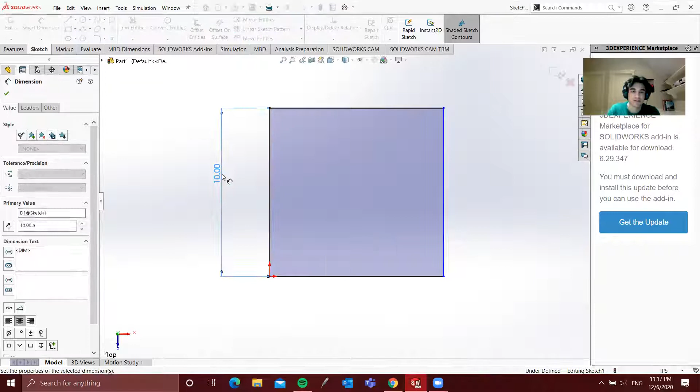On the top, actually, no, we'll wait for that. But essentially, I'm going to use the 3-point arc tool to inscribe a little arc within here. It's perfectly fine to do any arbitrary point. The only thing is you just want to make sure your angle here is 180 degrees as I've got it, coincident with the midpoint of this particular thing.

Although later on we're going to be getting rid of this line, so that relation will automatically go away. We'll fix that later on. But essentially, you want the side edges of this arc to be 1.125 inches away from the rectangle we've created, and then you want the radius to be 4.75 inches.

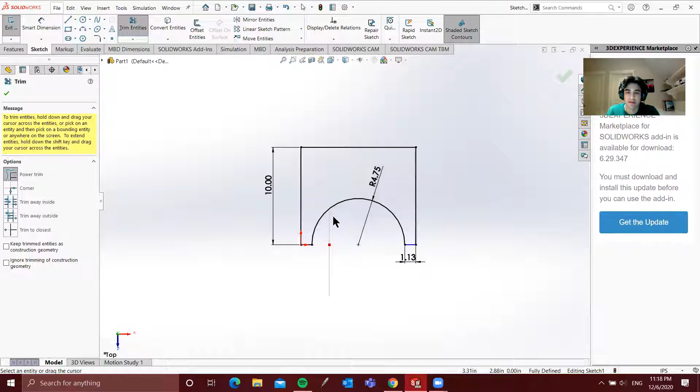There you go. And then the last step would be just to get rid of this line here. As you can see, we're underdefined, so we'll fix that very quickly. We have a length here, and we can apply a vertical relation with the midpoint of this top line. So essentially this arc is now stuck in place, it won't move anywhere, and we've fully defined all of our dimensions.

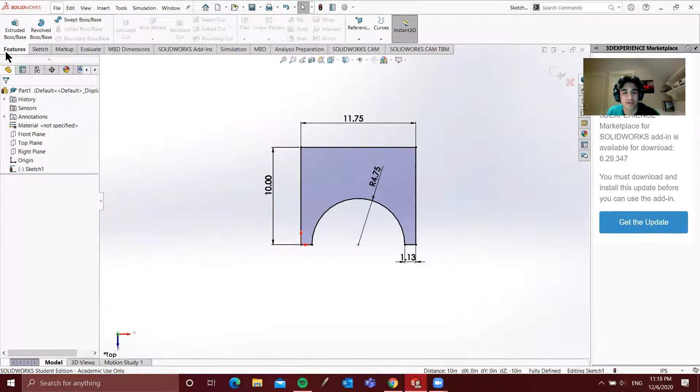So from here, I am just going to extrude this. Let's say 14 inches should be adequate. So it should look something like this, almost like a little Lego character's hand.

And what I'm going to do now is use our trusty mirror tool. This could be very useful because essentially what we want to do, so this is one cylinder, we want to propagate this 3 additional times. So what we can do is select our mirror face to be this edge right here.

And then we want to mirror this body. If we do that, and ensure that merge solids is selected, essentially that'll ensure the whole thing is just one homogeneous body and that you don't have 2 distinct bodies. If we press OK, you'll notice there's no line intersecting both of them, so this is just one proper body that we've created.

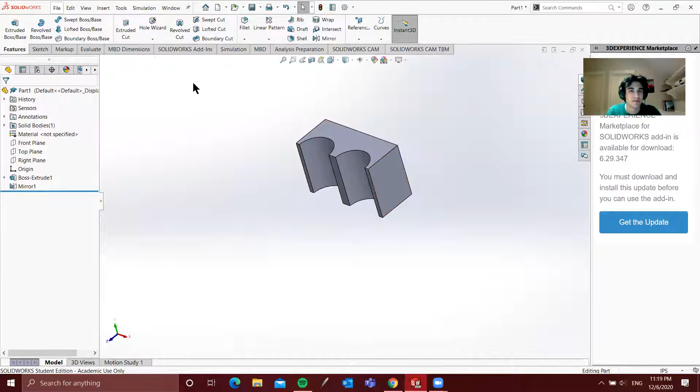Beautiful. And what we're going to do is just replicate this. So I'm going to click this mirror face plane right here, and then I'm just going to click this body once more. As you can see, we have enough space for 4 cylinders.

Now, keep in mind for this engine casing, what we're going to do is essentially have it be like half of an engine casing, just so you guys can see the actual motion of the piston without having to do a split section view.

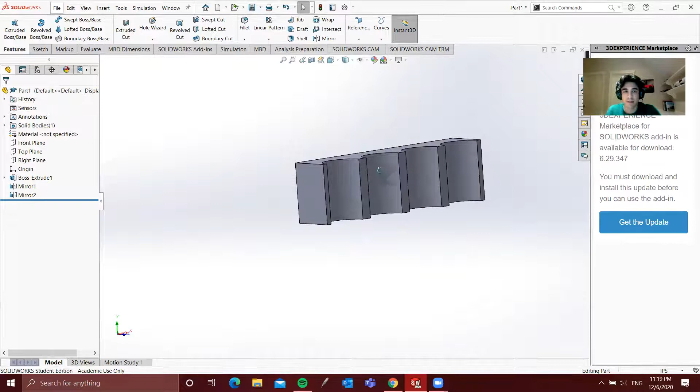Now we finished our first part. What we need to do is apply some fillets here. So let me see, our fillets, according to my dimensions, they should be 1 inch. Yeah. Oh, sorry. Don't know why it chose that.

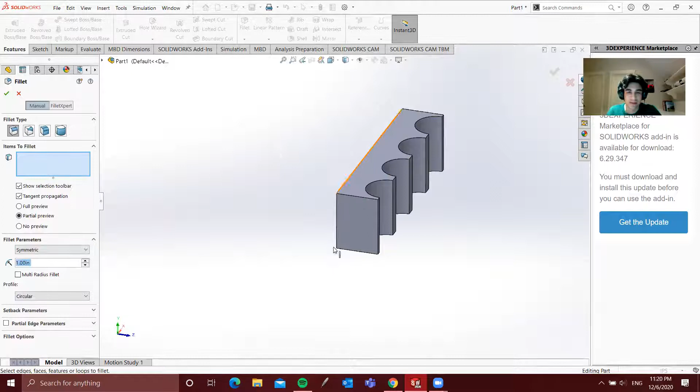Accidentally exited the choice. There we go. And we're going to just click these 2 back corners. All right. If we apply that, this is what you should have so far.

So we can already see this starting to take shape. I'm going to create a new sketch on the bottom of our new body, and make sure that the camera is properly oriented. From here, essentially all we have to do is press convert entities.

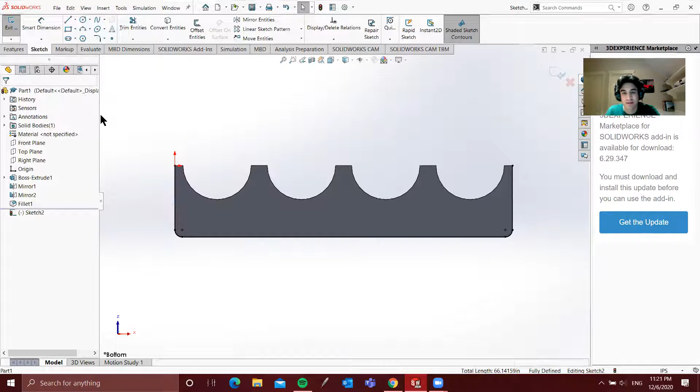Oh, my apologies. Okay, we'll select all of these different components, just these exterior components out here, and just press OK.

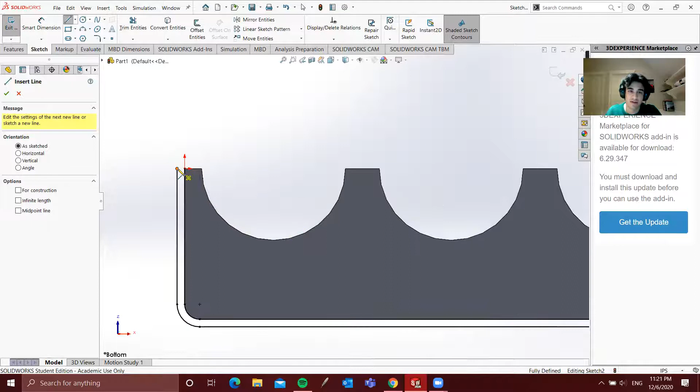And then from there, all we need to do is offset all of these features or lines by 0.5 inches. I'm just going to reverse the direction on this. And then the only thing left to do is close the contour such that we can extrude this, so we're going to draw a horizontal line from the top of each corner.

As you can see, we have this dark blue fill within our sketch contour, so this is good to extrude and it's fully defined. From here, we're going to flip the direction and extrude this by 0.5 inches, the same as the length of extrusion here, so we'll have a nice square rectangular prism. We press OK here.

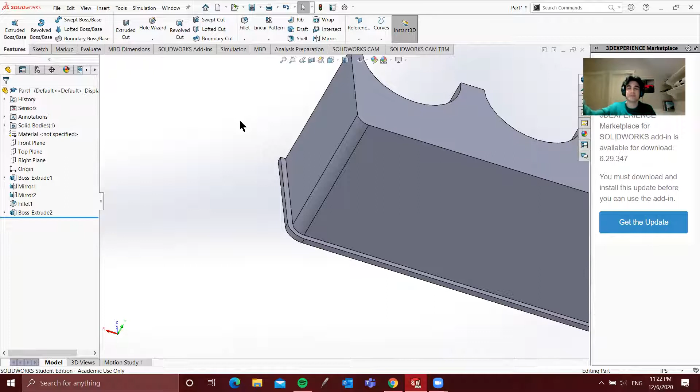Should be good to go, and it's merged our body. Now, we don't want to keep propagating the same feature over and over again for each of the different levels of this casing, so what we're going to use is the linear pattern tool. This will allow you to linearly create duplicates of the feature you just made.

We're just going to go up the casing. For our direction, I'm going to have this selected, just clicking this top or vertical line here. Doesn't matter, it can be any arbitrary line you want. Referring back to my previous notes, I'm going to put a spacing of 1 inch, and we want 14 instances.

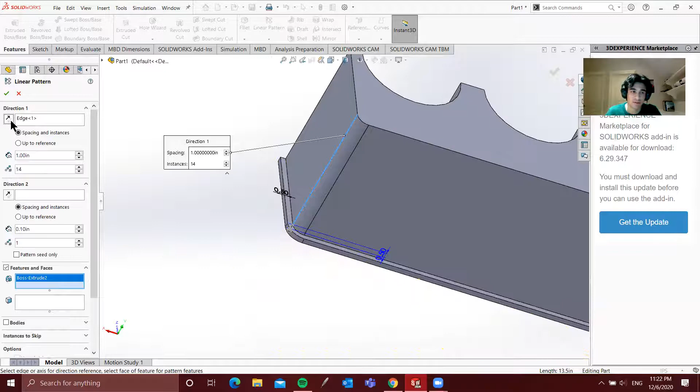Now what's left is to select our feature. We're just going to select this new edge that we created, and flip the direction, since we essentially want to create these ribs on the outside of the casing. And there we go, you see it's all perfectly fit, so we don't have any additional lines indicating that these are two distinct bodies.

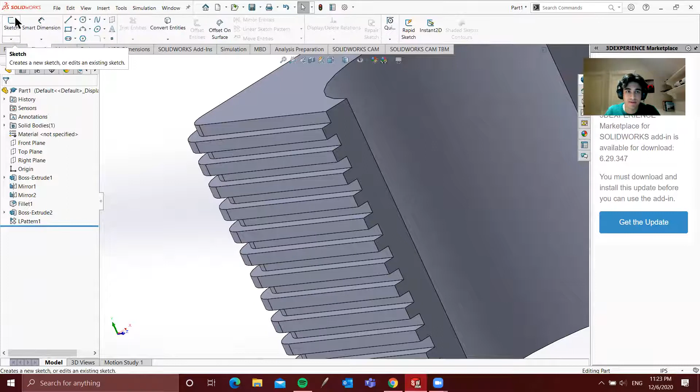Now what we want to do is create a new sketch, so we want to click on the casing here, not on these extruded fins, but on the casing itself. Essentially what we want to do is make our camera fit here. All right, and our origin is oriented correctly.

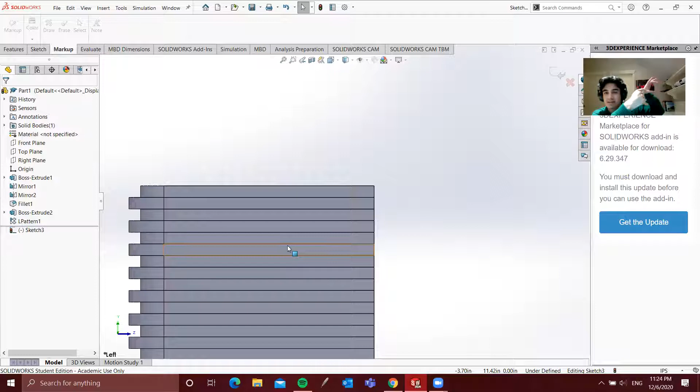Perfect. All we want to do is count between the second and third rib here: 1, 2, 3, we want to go in between these two. Essentially what we're going to be doing is create a little shaft on which the gear simulating our drive gear will rest, and it'll be able to rotate around this. So I'm going to create a circle.

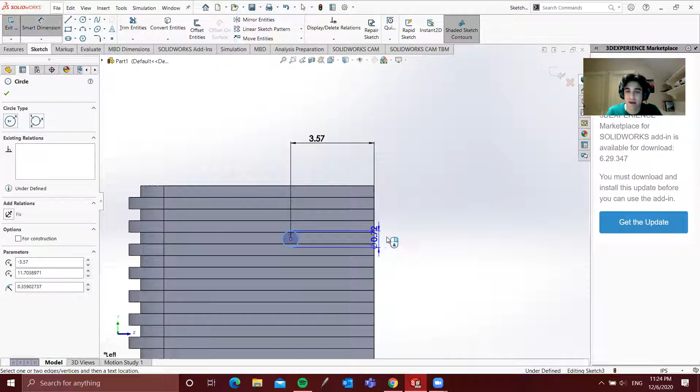We can essentially set the origin to be 3.57 inches away from this. Again, it's really up to your personal preference, this is something we mostly did arbitrarily, such that we can have a representation of what we want the actual piston, or the actual engine, to do.

What I'm going to do is take the distance between this edge and the other edge, so I'm going to measure this. Between one indent and the next indent, what's that distance? Our delta Y should be 0.5 inches. That makes sense, so essentially what we want is the middle of our circle here to be 0.25 inches away from one of the sides, right in the halfway point. And as you can see, it's perfectly lined up.

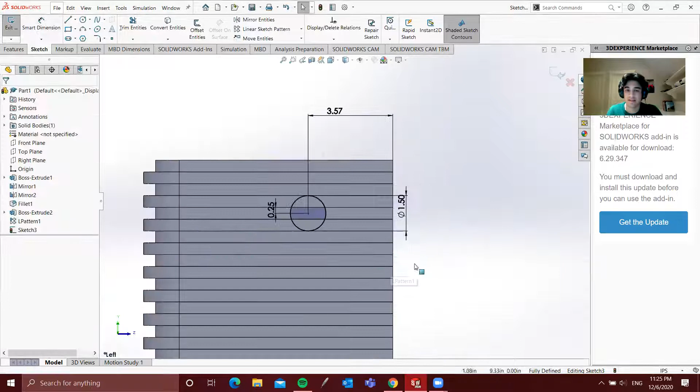We could have also used a tangency relationship here as well, it doesn't really matter, you're going to get the same result. So I'm just going to extrude this by 3.65 inches, and you'll see it comes out like so. That's perfectly fine.

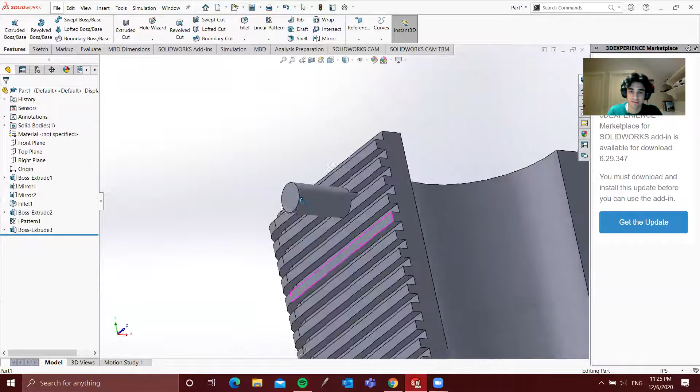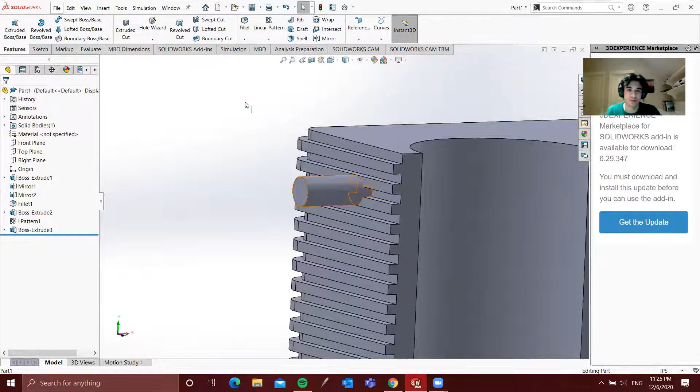Again, it doesn't really have any functional use to it. In real life it wouldn't actually be like this, but for the purpose of this tutorial, we're not going to go into the intricacies of the actual connections for the Inline-Four engine. Essentially the focus is mostly on the crankshaft and the pistons, which are the most integral components of this whole assembly. All right, so what we've done is we've created our casing.

So I'm just going to save this. Let's call this our casing. Beautiful. And I'm just going to create a new folder, so video.

Oh, I've already got another one called vids. I know, very profoundly named, but hey, what can we do? It's pretty late. Now I'm going to create a new file.

This is essentially going to be the accommodation for our crankshaft. The crankshaft needs to fit on a circular region so that it can rotate freely, but it doesn't move from a translational aspect, from an XYZ aspect. It's all about those support reactions, baby.

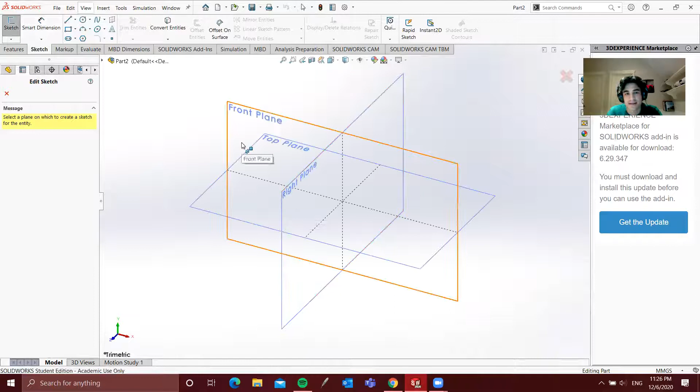So what I'm going to do is click on this right plane and create a new sketch. Essentially what I want to do is create an annulus of sorts. Let's see, what we can do is just create one circle. Oh sorry, our units - IPS, very important.

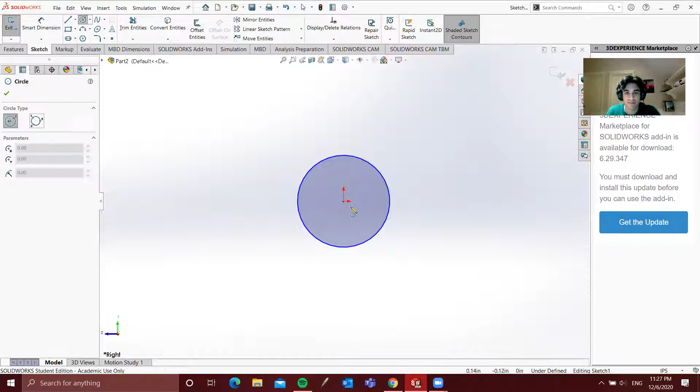We'll go back into our sketch here. So IPS units, and essentially I'm going to create two circles - the first one's going to have a diameter of 4. Actually, let's skip that step because I want to stick consistent to our tutorial document.

So what I'm going to do is actually just draw a line from the top here, and essentially all we're going to do is trim these following entities. So essentially in our annulus, we want half of it. Realistically, the accommodation would actually be a full circle, but just to show the motion of the piston and the crankshaft, we're only doing half of the casing.

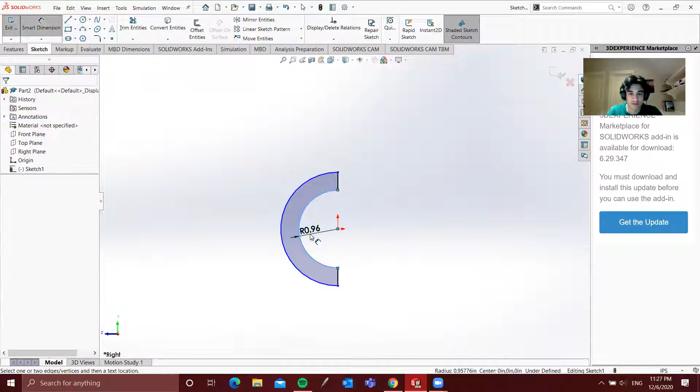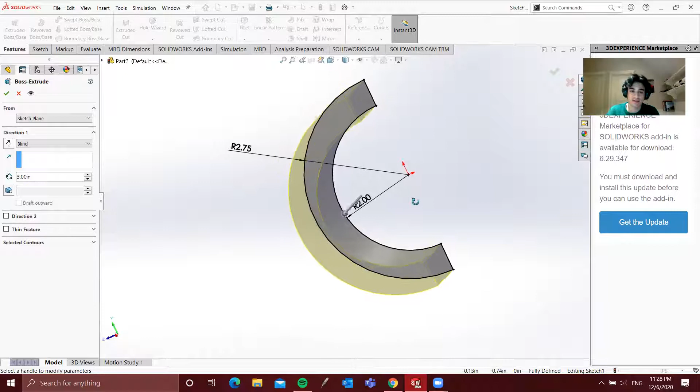So what I'm going to do is apply a dimension of 2 inches for this inner radius, and for the outer one, apply a dimension of 2.75 inches for that radius. And what we're going to do is extrude this semi-annulus by 3 inches - let me check, no sorry, this direction. Essentially you want your semi-annulus to be on the left-hand side.

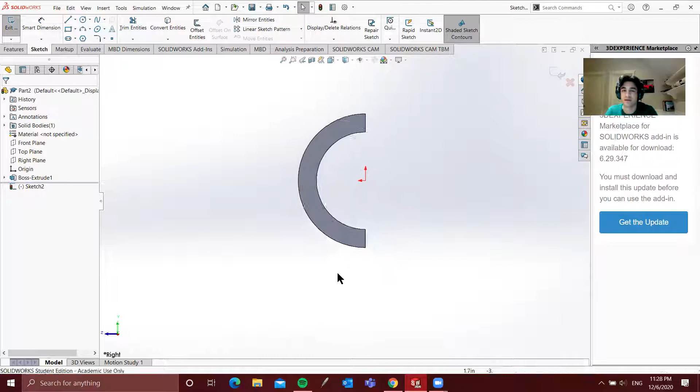Perfect, starting to come along. Now what I'm going to do is create a sketch on this back end. Essentially this is where we started our sketch from for the semi-annulus, and this step is a little bit more complicated than the others, so I'll go through it a little bit slowly.

Essentially what we can do is just mirror this about itself. So I'm going to mirror this inner chain - whoops, my apologies, I'm going to mirror this inner chain, and we're going to mirror it about this line here, so we have 2 even squares here.

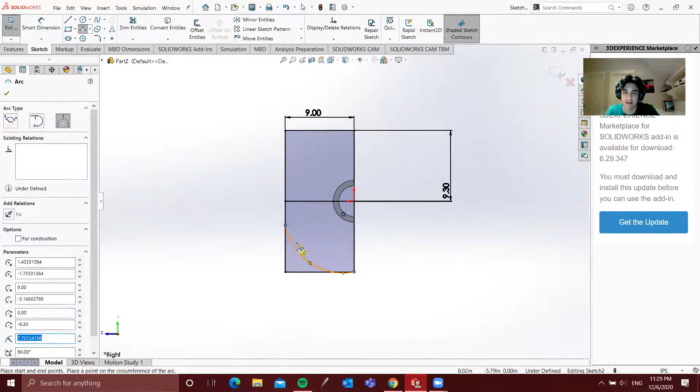All right, and essentially from there, what I'm going to do is just create an arbitrary arc here that will essentially connect to this bottom corner, but it doesn't really matter where you select that first vertex that I created here.

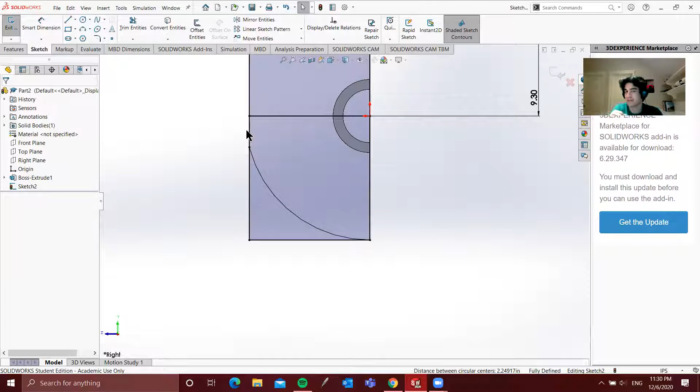Essentially what you want - you're going to click on this arc and click on this arc, shift click, and you want the 2 to be concentric. So essentially what they'll do is follow the same arc. It's almost like this arc was an offset that's been cut off - they'll follow the same outline.

And from there, we can essentially just trim out the bottom here and then trim this part out. As you can see, we've actually lost a lot of our dimensions, mostly because the length was a reference dimension for the width, and for the height we no longer have the bottom edge, and so on and so forth.

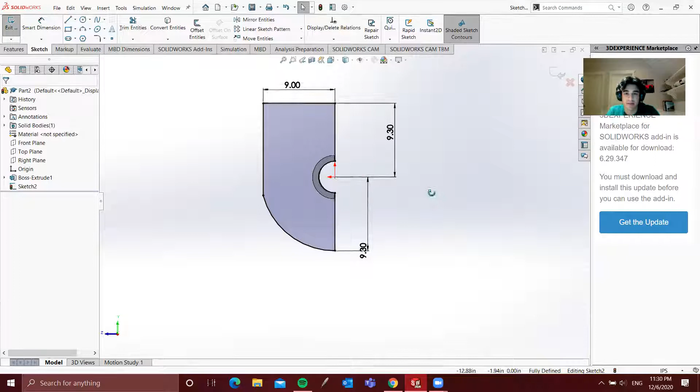I'm just going to press the Convert Entities tool and convert this edge here, and essentially trim this middle portion as well. We can set this again to be 9.3 inches, as well as the bottom - we're missing out on that. As you can see, it's fully defined, and now we have the general shape of our casing here.

So I am going to extrude this by 1 inch, facing opposite of the semi-annulus. Beautiful, now I'm going to sketch on this back end here.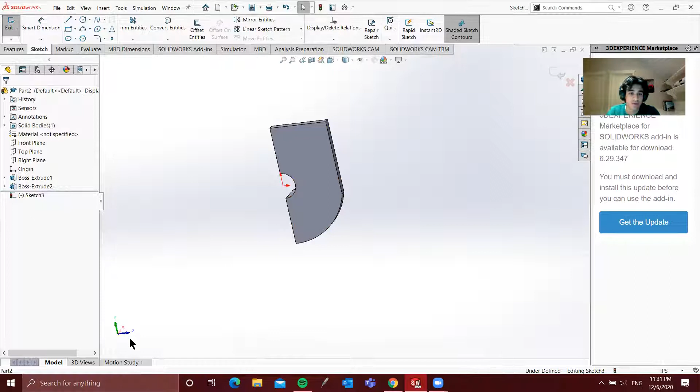Essentially what we're going to do is just replicate everything that we had, but we're going to offset it. So I'm using the Convert Entities tool, essentially copying everything onto this plane - these two lines now fall under our current sketch. What we're going to do is use the Offset Entities tool here, and I think we're going to offset this by 1 inch, if my notes treat me correctly. Yeah, that looks about right.

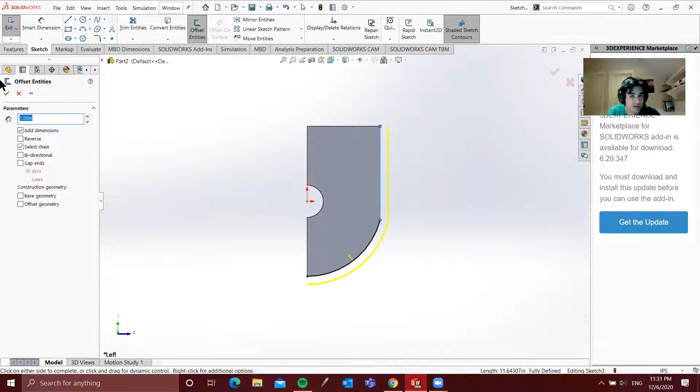And we'll close off this loop with lines, and we should be good to go. Now, as you can see, we have this empty corner here. What we're going to do is extrude this new outline all the way across here, and then mirror it.

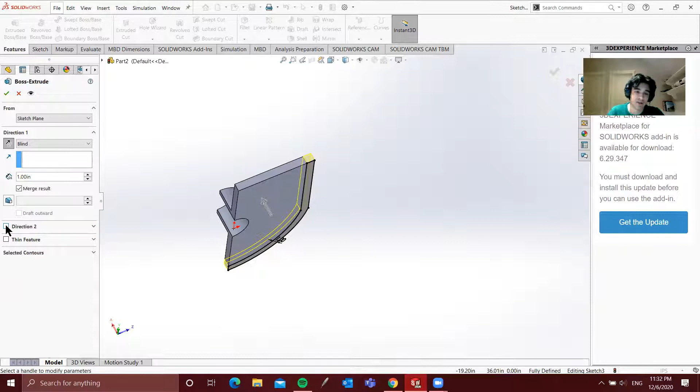So I'll show you how to do that. If we press Extrude Boss/Base, we want this to go in two directions. I'm going to reverse the first direction and extrude by 1 inch - that's just to accommodate for this corner piece. But we'll enable the second direction as well, and for that we're going to extrude by 22.4 inches, according to measurements we've done before.

And if we do that, this is essentially the body that we're going to get. As you can see, it's half of our casing, or half of our crankshaft accommodation. So it's really starting to come together.

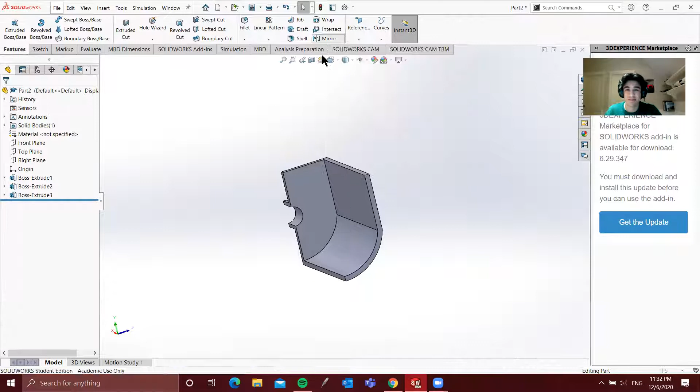What we can do, the notoriously easy part, is just mirror this about our new mirroring plane, and mirror this entire body. Essentially what we'll have is the exact same thing on the other side that's been fully merged - I had Merge Solids selected there. And this is our accommodation. Beautiful, we can save this.

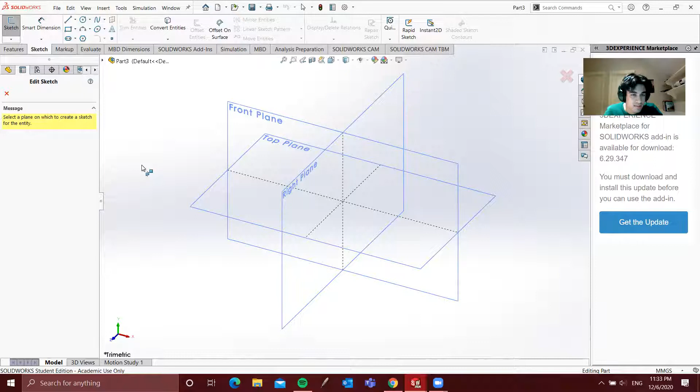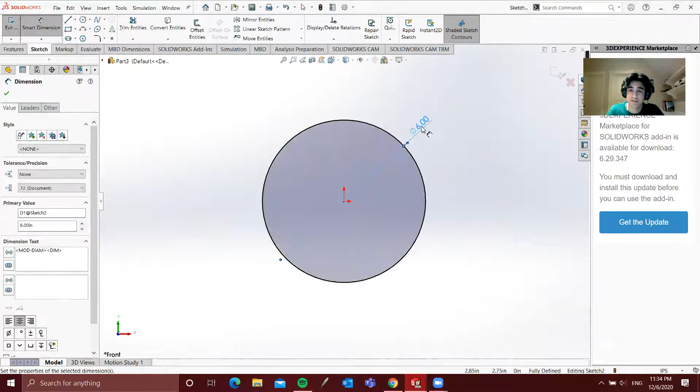But let's see. Okay, so for this, we could just select the front plane as our sketch plane. Forgot units - IPS, very important. Let's do that again. Essentially what I'm going to do is create a circle, and give this a diameter of 6 inches. Okay, diameter of 6 inches.

And essentially what we're going to do is extrude this by 2 inches. So we'll go this way. Nice, alright, I'm also going to set a reference axis here.

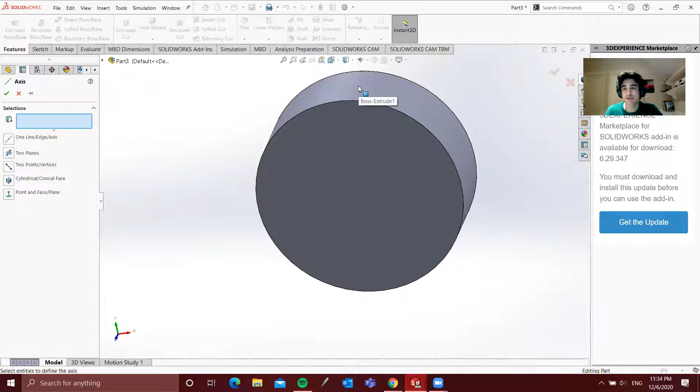So I clicked into Reference Geometry and Axis. Essentially what we're trying to do with this - if I click here, this reference axis has an axial reference point within our cylinder. And what I'm going to do is a revolved cut around this axis. You'll see what I do quite soon.

But essentially what I'm going to do is create an indent within this gear such that the belt can actually fit into it. So there's a little groove for it.

So we'll have that axis here, and then we can create a new sketch. In terms of our plane, we can select the top plane - that would be ideal for this. Okay.

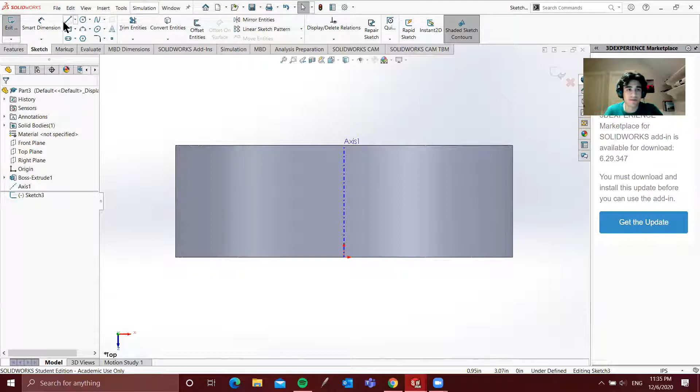Now, essentially, we have to create this little outline here. So what I'm going to do is create another center line here. This is essentially going to be like a form of reference geometry for us - it won't actually contribute to the shape of the object.

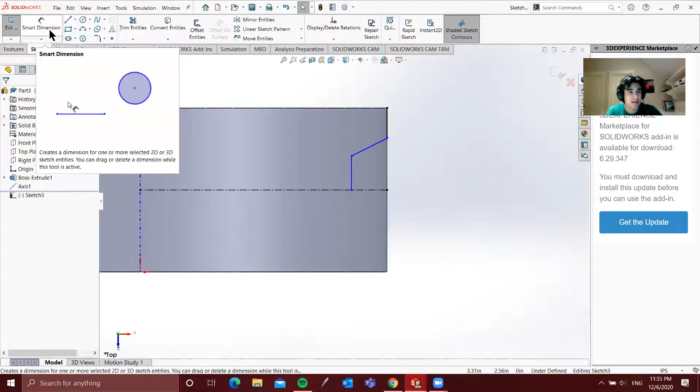And essentially we're going to draw a couple of arbitrary lines that look somewhat like this. Okay, so that's one portion of it. Essentially, we can just apply our dimensions here - this was 0.5 inches.

This dimension, the vertical dimension of this component, should be 0.25 as well. And then the vertical component of this should be 0.5 inches. There we go, it's fully defined.

And what we can do is essentially mirror this - I'm going to mirror these three lines about our center line. So this is what we were going to use this for. I press OK there. Beautiful.

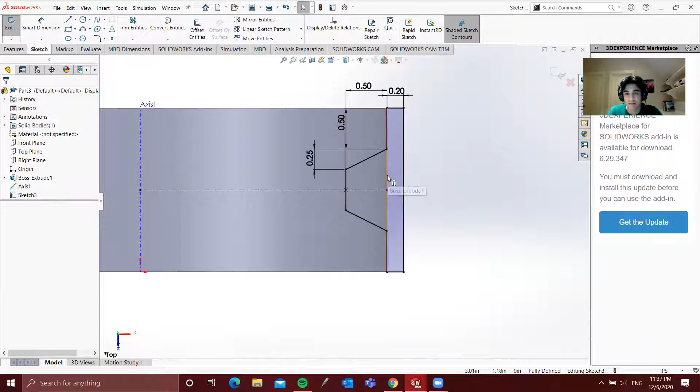And essentially all we have to do now is close this contour. So I'm just going to create an arbitrary box such that our revolved cut fully engulfs this - let's just say 0.2 inches. Again, this part doesn't really matter. Let's see, okay, everything should work now.

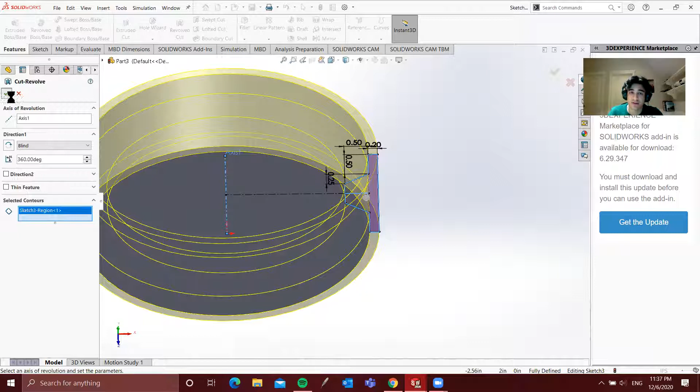So essentially now what we're going to do is click Revolved Cut. And our line of revolution - let's get rid of that, let's click our axis. And then for our selected contour, we'll select this contour here. Essentially, if we press OK, you'll notice we created this geared component where there's a groove right in the middle of it.

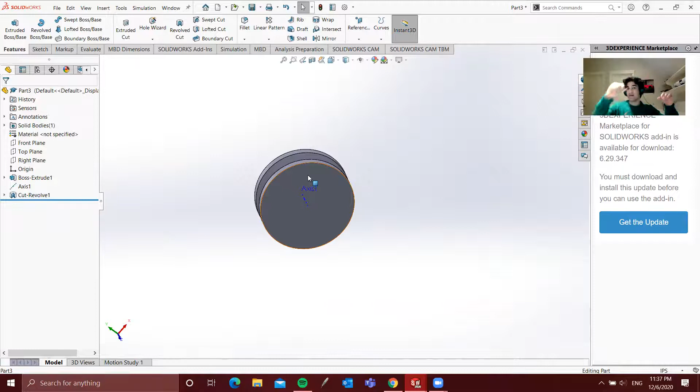And as well, if you remember - I don't have the casing open - but essentially that cylindrical extrusion we had towards the top of the casing, this is going to rest on that axle there. So what we're going to do is create another sketch within here, normal to this plane. And if you remember, the diameter of that was 1.5 inches.

So we'll put that there and essentially do an extruded cut and click through all, or 2 inches. Again, doesn't really matter, but through all is probably the best choice here. And this is our, let's call it, driven wheel.

Beautiful. Okay, now we've pretty much got everything. Yeah, we can create a new assembly. So I'm going to create an assembly from this part.

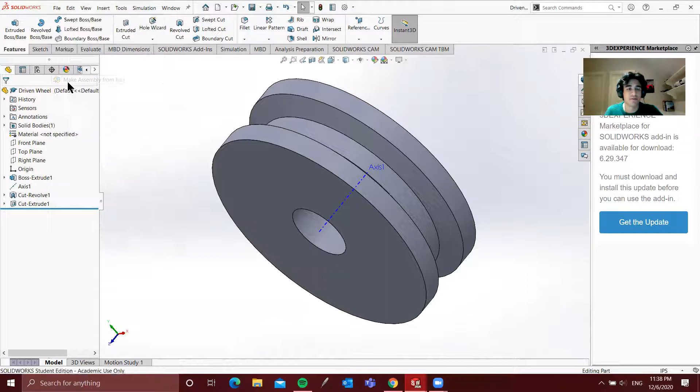Oh wait. Did I? Okay, let me double check. Okay, this is an IPS, perfect. Yeah, it changed and it said MMGS for a moment there, and I was like, oh boy, we're gonna have to do this again. But no, we are all good.

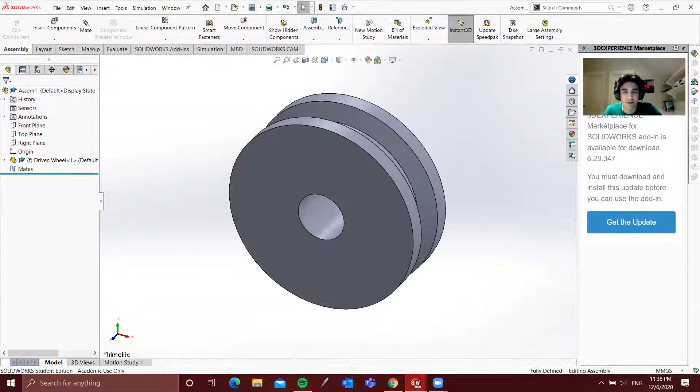So we're within our assembly now. Let's just have everything in here. Let's insert our casing. Beautiful.

And this driven wheel should not be fixed, so we'll make that a float, and then essentially make this component fixed, so our casing. Now I'm just going to do a regular

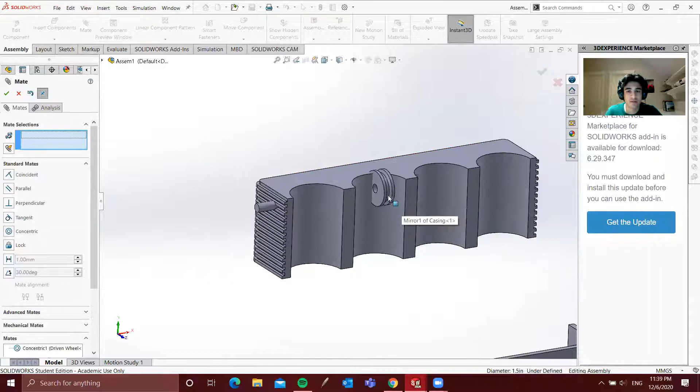concentric mate about this little axle here. And with regard to the actual position of this, let's just say this face is going to be coincident with that face. So this may not be the actual true way it fits. Again, we'll fix that quite soon.

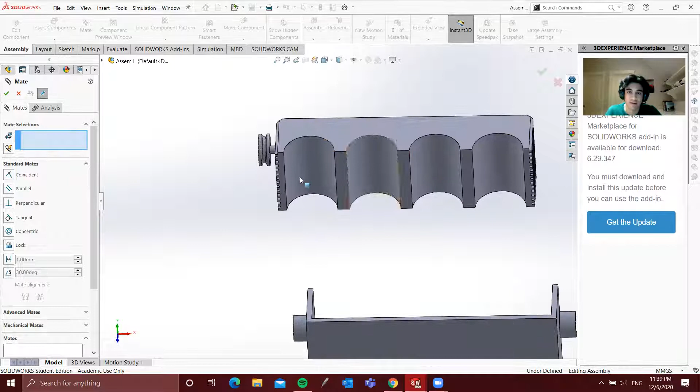Next, let's see, we want this casing to be flipped around and symmetric with the casing on top here. So essentially what we're going to do is we're going to go into our advanced mates and click width.

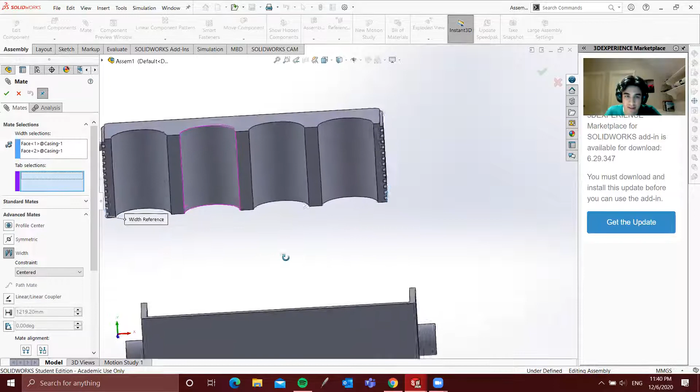And for our width selections, we can essentially select this bottom side here and this bottom side here. Again, it doesn't really matter as long as they're the same mirrored distance. Okay, and we're just going to take this mirrored tab and this mirrored tab to go.

And we're going to change the mate alignment such that it looks like this. Perfect. And then as well, what we're going to do is we're just going to apply a coincident mate between these two,

which here, I got to fix the orientation of this guy a little bit. One moment, sorry about that.

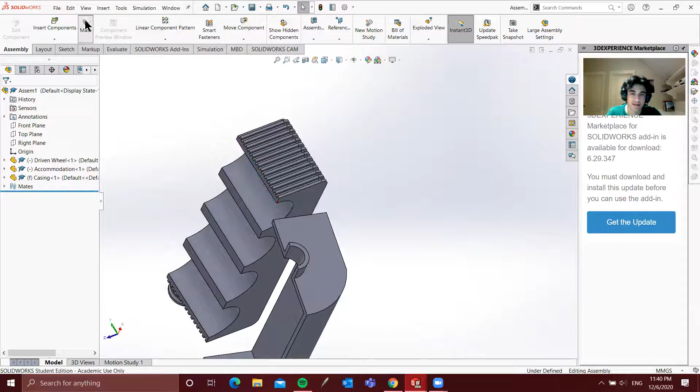Beautiful. Okay, yeah, because sometimes SolidWorks rejects items that aren't necessarily close to one another for coincident mates. But yeah, it should be better now.

Okay, and then what's left is to just sort of attach this to this component here. And as you can see, it's a perfect fit. Nice.

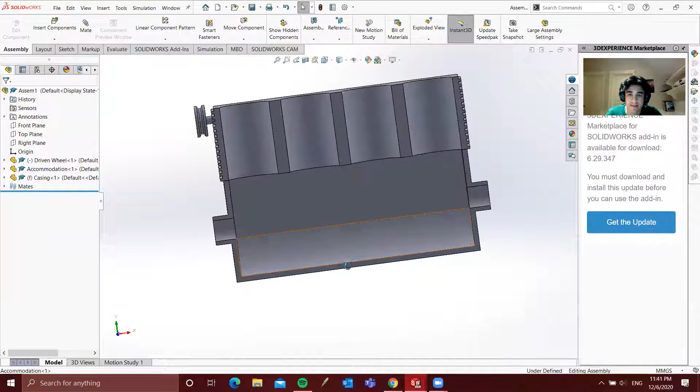Now, what's left is just to insert our previous components. So if I go back into my workshop, we can put in our crankshaft. Now, the one thing I will admit is that the crankshaft actually doesn't go the entire way here.

So that was more or less an error from a previous video, but the solution is very simple. Essentially, you could just extrude this. In fact, I'm going to do that right now just for ease of mind. So let's just create a new extrusion on this crankshaft and say it is,

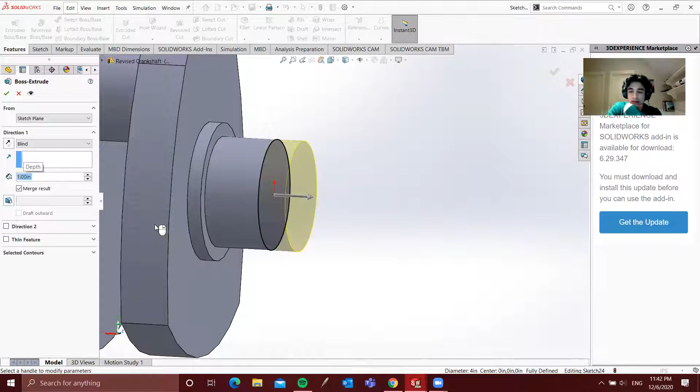so we're going to convert entities, put a new circle here, and essentially extrude this by, for a comfortable margin, let's say 2 inches. No, let's do 3 inches. Yeah, that should be better.

Okay, yeah, that looks a lot better in my opinion. Let's be more safe here. Sorry, let's do 5 inches. Yeah, okay perfect, this is much better.

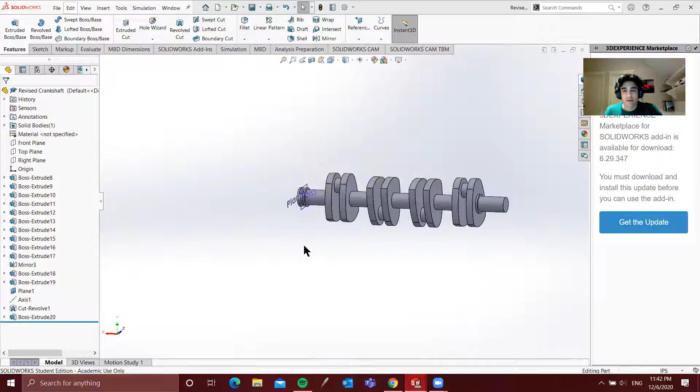Now, if we go within our assembly, you'll see everything's been updated. So we can just apply some concentric mates here. And essentially all we want is for this to be shifted down like so. Beautiful.

Now, what's next? We want to put in our pistons. So we go and insert our piston assembly that we created before. So I've labeled it aptly piston assembly.

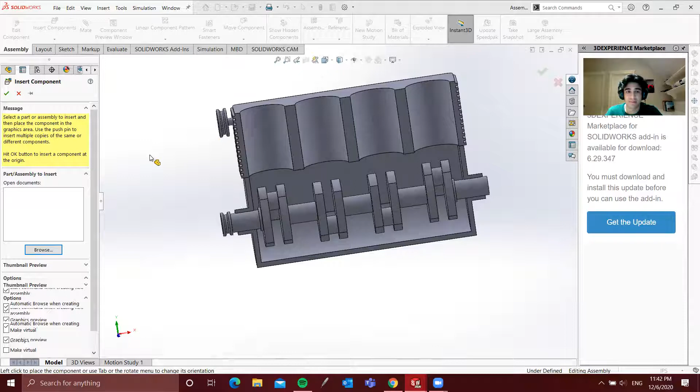It may take a little while to load because it's some more complex geometry, but essentially if we bring this closer here, there we go. Yeah,

SolidWorks can be very deceptive in terms of the space in which all of this fits, but essentially we're going to apply a concentric mate between this part of the crankshaft and the actual piston itself, such that it fits like so.

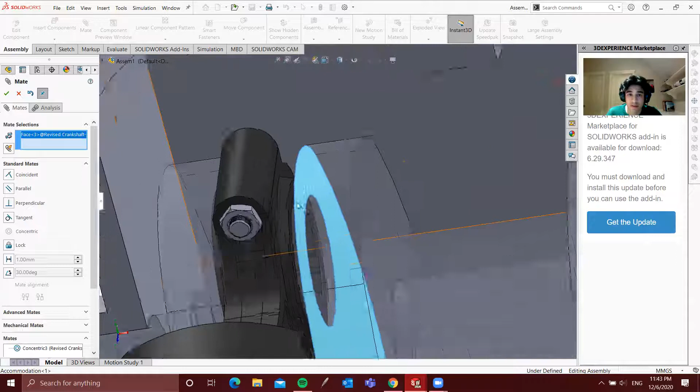And then essentially you want a coincident mate between the inner edge of this with the outer edge of this piston, such that it's centered perfectly.

And then furthermore, you'll notice we can still move this crankshaft like so. To fix this, essentially what I'm going to do is I'm going to create a concentric mate with the piston head and the cylinder itself.

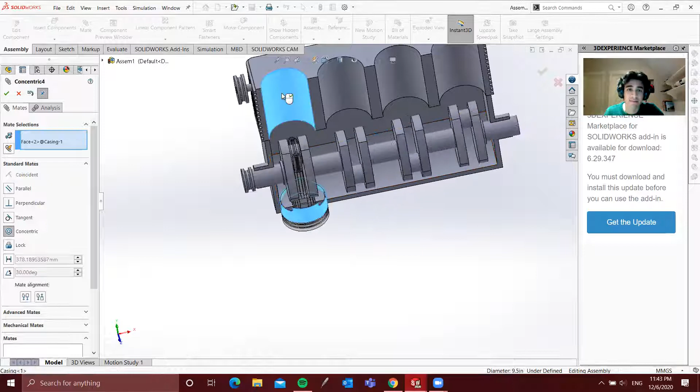So if we click here and click here and change the rotation, you'll notice we have a fully concentric mate. And then it's under defined for some reason. My SolidWorks tends to glitch out in that regard, but you'll notice this is all perfectly lined up.

So that is awesome, okay. And then furthermore, we can just press Control... oh whoops, that brought in the piston head. That is not what I wanted to do. My apologies, so I want to bring in the full piston assembly.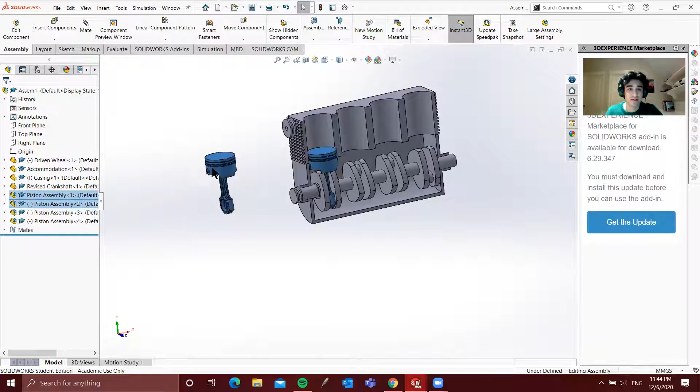So I'll just Control Shift that, Control Shift once more, and then Control Shift once more. Whoa, whoa, whoa, that created way too many. My apologies, it's because I had multiple selected. But let's see, we have 4 pistons. That's perfect, our car only has 4 pistons.

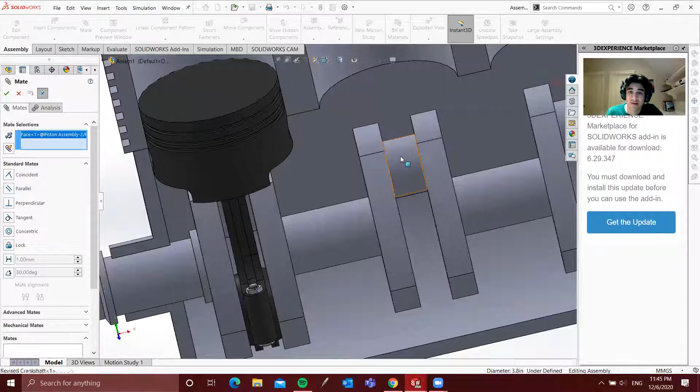Now we're just going to repeat the same process. So if you want to skip ahead for this part of the video, be my guest. That is totally fine, and I will not hold it against you. Not like I ever would.

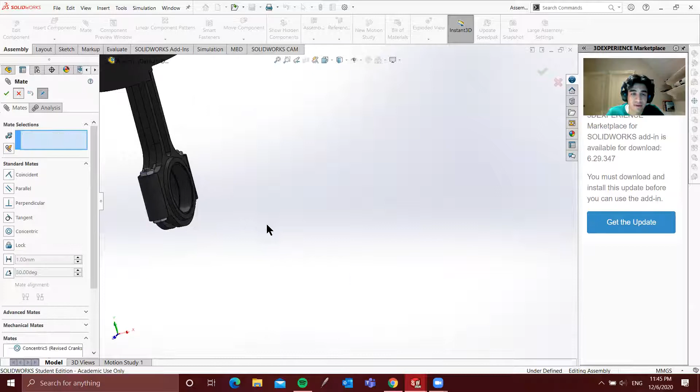Okay, and this guy is going to mate like so. Alrighty, oh I may have not selected the right one. Which one did I do that mate for? My apologies. I should definitely be a lot more organized in the way I do these mates, but unfortunately, beggars can't be choosers sometimes.

Okay, and then finally, we just want to establish a concentric mate between these two. For some reason it's not cooperating. Oh, it's because this thing is fully defined. Yeah, I'm not sure why it's doing this, but let's see if we can get rid of one of these mates, perhaps it will help us out.

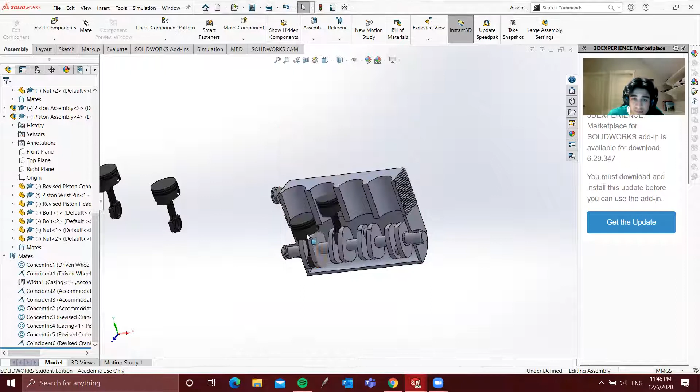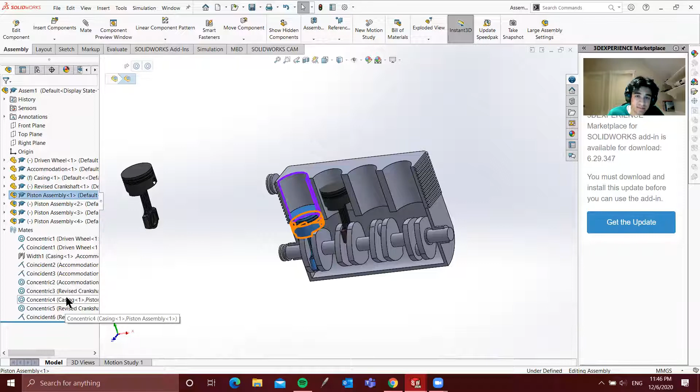Let's see, is it fully defined? Yes, it still seems to be. See, this is, yeah, a very peculiar part of my SolidWorks where for some reason it just completely fully defines my objects, even though the mating should be sufficient to allow it to move.

Okay, I think the best way to approach this here is perhaps to suppress some mates, and yeah, we'll suppress this one for now. And there we go, the piston is free to move. We can try applying our other mates first. Okay, it's one mate. See, it just fully defines it with that concentric mate. It's absolutely peculiar, should be able to move freely.

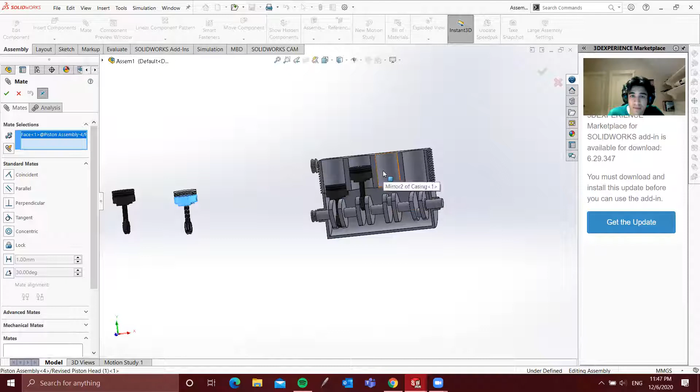Okay, and yeah, essentially you just want to repeat this entire process multiple times. It's a bit frustrating, but what can you do? But as you can see, our piston, or our inline-four engine, is starting to come to fruition.

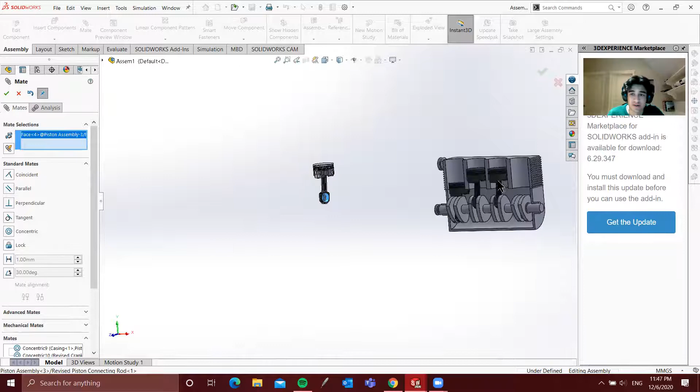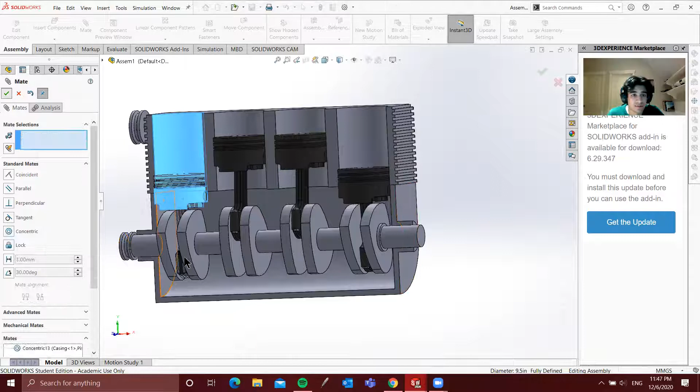So if we select this final face, okay, and then this guy is going to be aligned like so. Yep. As you can see, we should be all good to go. Then we'll just apply this final concentric mate. Beautiful, and there we go.

Here is our piston, or I mean, sorry, our inline-four engine. Now, the one thing I do notice is this axle seems to be far too short. So what we can do is we can actually make that a little larger. So let's go back into our casing here, and let's make that approximately 5 inches. Should be more than enough.

Okay, if we go back into our assembly here, essentially, there we go. We have these two sort of semi-aligned with one another. Let's add 0.5 inches onto that, just for good measure. So let's say 5.5 inches. Brilliant, okay.

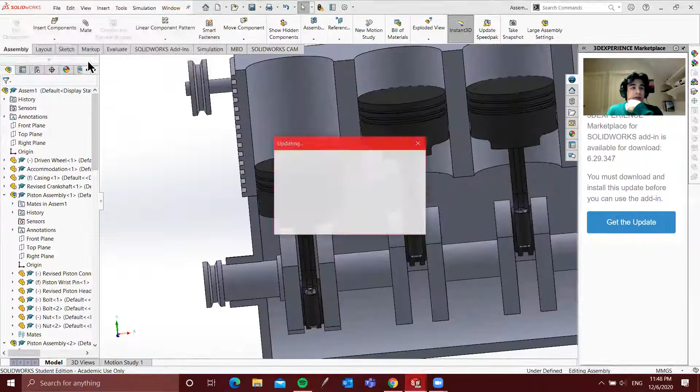And then the final step would just be to add the gear and belt mate. So I'm not going to go into the intricacies of this because I'd like you to actually play around with it a bit and see how it works for yourself. But essentially, I'll show you how to get started. And this will help you with your future motion studies.

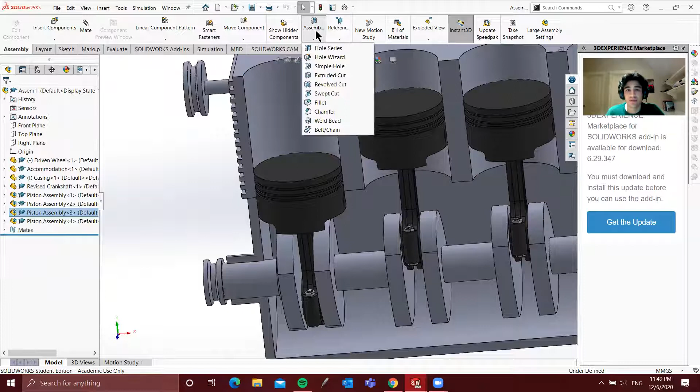So essentially, if you go into Assembly Features here and press Belt/Chain, essentially what you can do is you can click two members. Now, the reason why, if you remember, I created this groove for this particular component here is because we want our belt to actually fit on there. So outside of class, I actually work on the Baja team's CVT transmission, and this is sort of the same principle, where you have a belt dictating the power output and transmission.

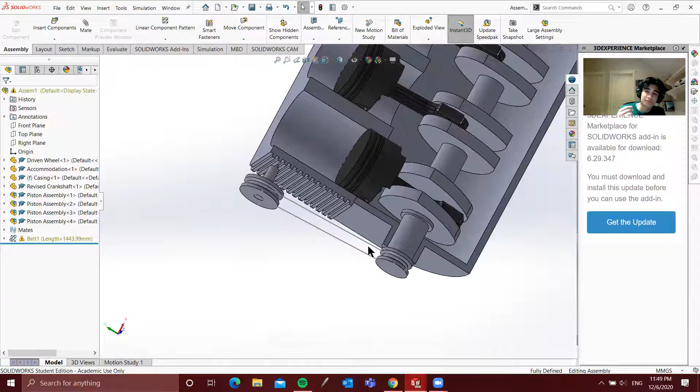If you click those two and press OK, essentially you'll have the outline of a belt. And from there, you can essentially have sort of a gear mate to allow it to move proportionately. Again, that's something I'd recommend playing around with.

But I think this, for the most part, concludes our inline-four assembly. Now, we did this fairly quickly, so there may be a few small interferences here and there, but I hope you generally got the gist of the tools to use to actually make this engine.